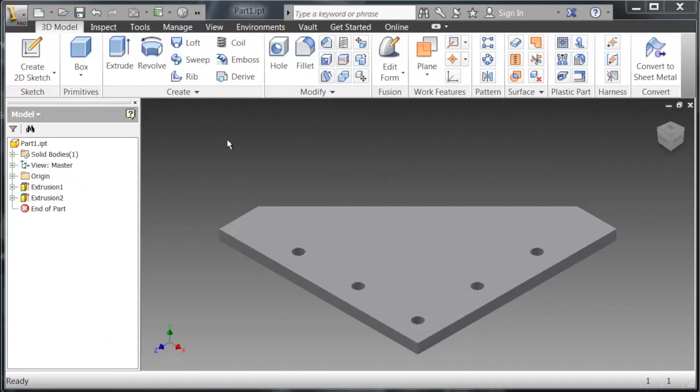We're going to go over and create new, and you can either do a DWG or IDW. So we're going to actually open IDW. They're pretty much the same thing. It's going to be the identical environments that you'll be opening into. So we're going to start off by editing the sheet. We want it to be made for a normal printer, so we're going to select sheet size A. This is an 8.5 by 11 sheet.

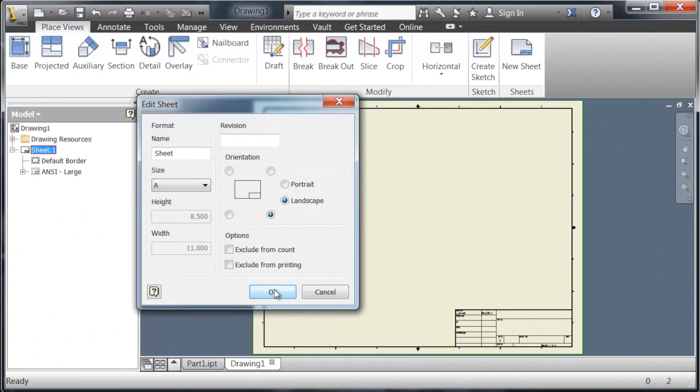And now the corner box is way too big, so we're going to actually go ahead and delete that. And then go under Drawing Resources and select ANSI A. This is a smaller box, looks a lot better, put it back in. So now we're gonna go ahead and select the base of our part. So we go and find our part, select the part, and then it gives us a couple different options.

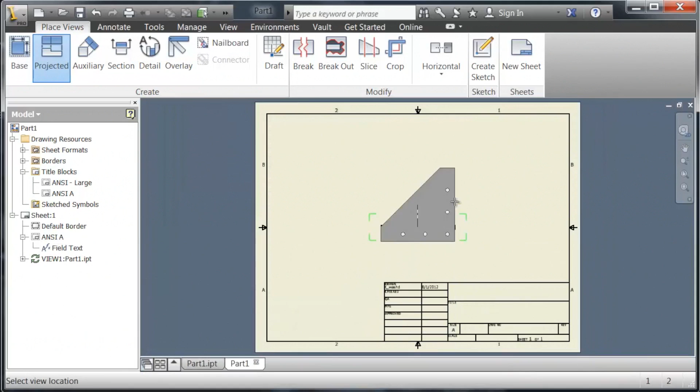We can see on the right, there's the different views that we want the initial orientation to do, and then down at the bottom, the scale. So our part's a little bit too big to fit on a sheet. We're gonna change the scale to 1 to 2. There you go, it automatically puts in that first view that we selected, and then we're going to go ahead and select 2 more views, right click and click create.

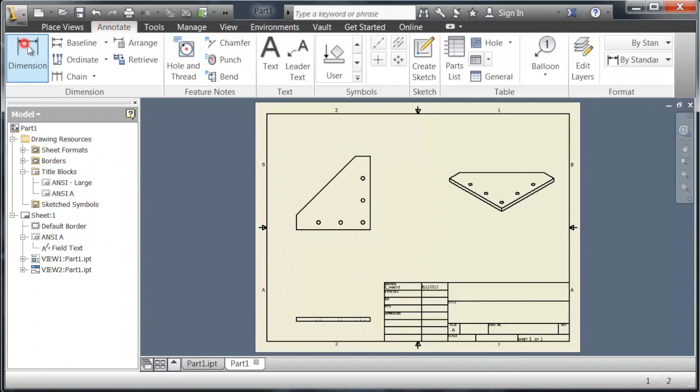This brings these into a sketch view. You can then drag these around, reposition them so they look good. So you have the ISO, the front, and then the side view of this plate. So now we're going to go over to the annotate panel and select dimension. So now this is the more important part of things, is that you always dimension from one corner. We're actually going to take edit dimension when created off, because it's just annoying. It's the same thing pretty much over and over again.

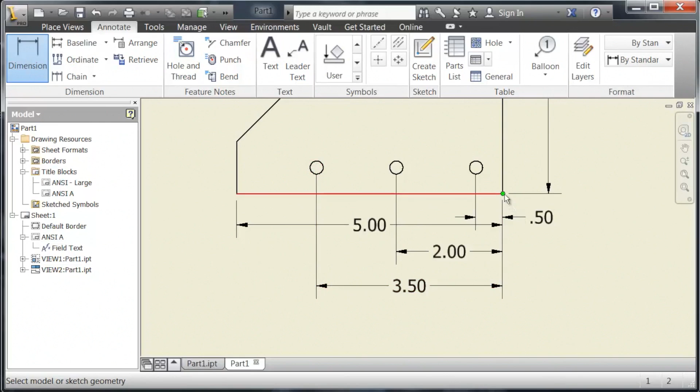And it's important that you dimension from one corner always so that you have a consistent part, because if you cut out a sheet of metal that is 5 inches by 5 inches, odds are it's not exactly going to be 5 inches by 5 inches. So we're going through and we're selecting everything off of one corner inside the part, and make sure that you select the centers of the holes and not the edges. If you get the edges, you're going to be giving wrong dimensions that are just confusing for the people that are on the shop floor.

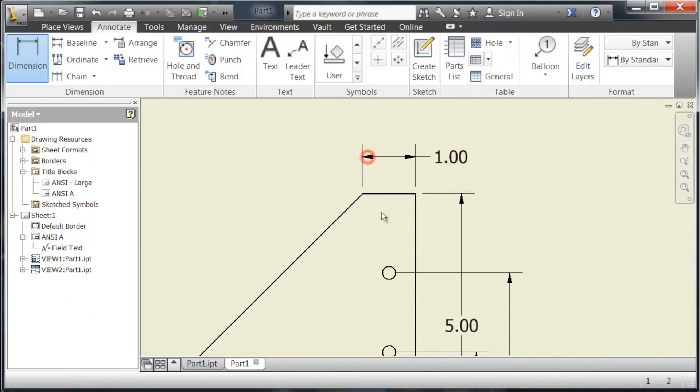So go through, get all the dimensions, and then you can get these side dimensions. These are not really crucial, so you don't really have to make sure that they come from the same corner, but you want to make sure that they at least are coming from the same side, which they are. And then we go down and define the plate thickness.

So now we're going to actually go click OK, and we're going to reorganize these dimensions so that they look good, because the whole point of this is so that it's readable and that your people on the floor can make good quality parts. So you want them to be able to easily read and see the dimensions. You want to also make sure that the larger dimensions are on the outside with the smaller dimensions on the inside, so you can see that pretty easy.

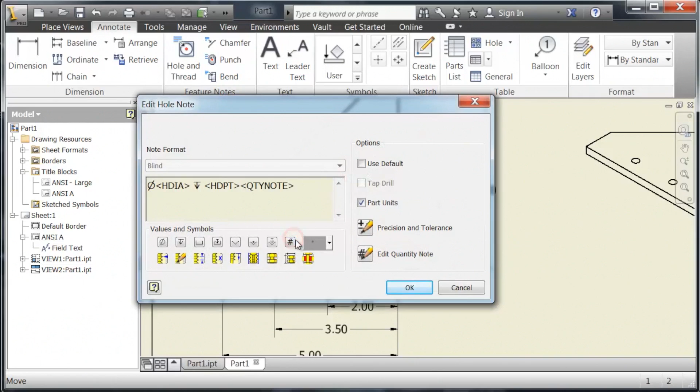And we're going to go ahead and select the hole and thread tool, select the first hole, and then go in and edit that. And we're going to add quantity notes so that you know that there's, I'm sorry, 5 holes, 5 1/4 inch holes, and that they go all the way down. And that is it.

So now all you have to do is go up to File, select Print, and select your printer, and there you have it. You have a printed dimension sheet that you can give to pretty much anybody, including a professional shop, and they can make that part exactly how you want it.